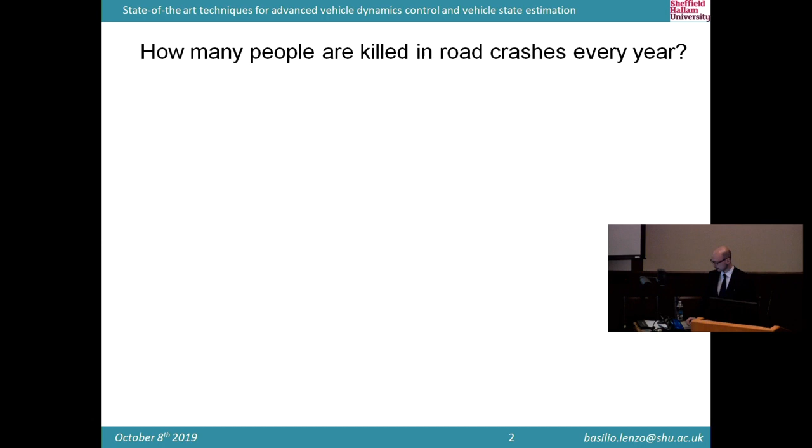Roughly, how many people do you think are killed in road crashes every year? Like, I don't know, 1,000, 10,000 or something. Just give me a figure. 100K. Unfortunately, it's much more than that.

Obviously, we're all aware that there are vehicle active systems such as the ABS or ESC that help us, to some extent. ABS is the anti-lock braking system - it reduces stopping distances and keeps vehicle steerability. ESC, electronic stability control, prevents unintended, potentially dangerous lateral behavior. If you look at figures of estimated lives saved by this kind of system, in particular ESC, you'll find that it saves roughly around 2,000 people per year, which is great. But if you look at the amount of people that unfortunately die every year, that's much more than that.

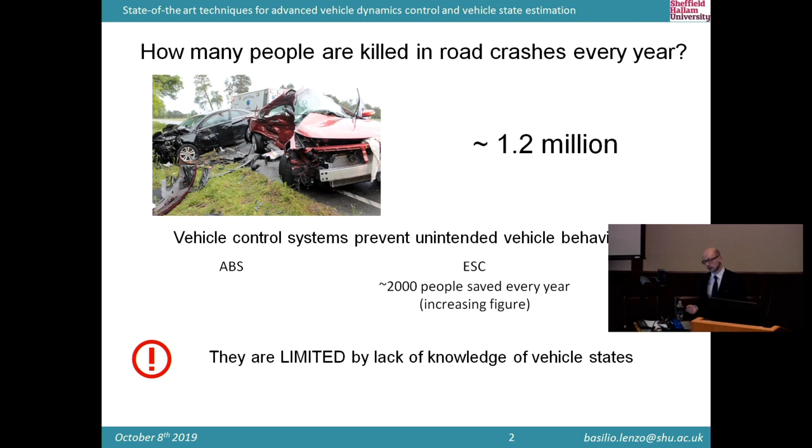So what's the point? These systems, like the ABS, the electronic stability control, they do what they can do based on what they know about the vehicle. With states, we mean key parameters that represent the vehicle motion. An easy one is the vehicle velocity. Some others are less straightforward, but they would tell us a lot. So what's the idea? If we could know more about what's going on with our vehicle, we could do much more than the electronic stability control.

The main idea is - I want to say something about ESC shortly - if you look at how it works, essentially the electronic stability control intervenes, it is triggered when it detects that something is not right. So it corrects a potential dangerous behavior of the vehicle. But when it does so, things are already not good, if you know what I mean. If we could be able to know everything about the vehicle and not just what we are able to know so far, we could actually intervene and anticipate loss of control situations rather than reacting to them.

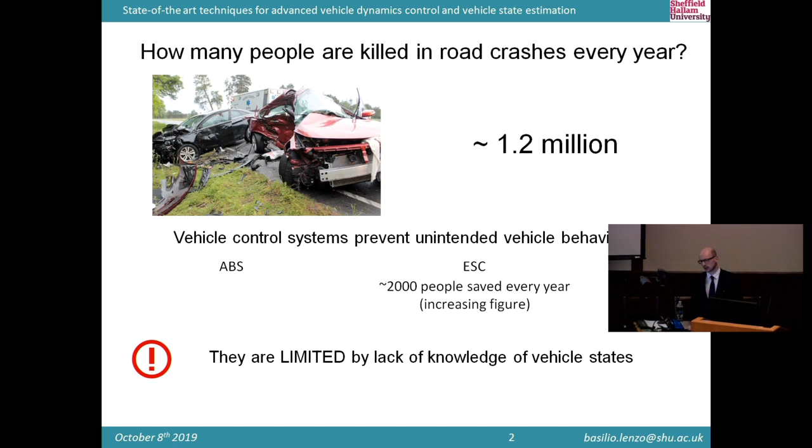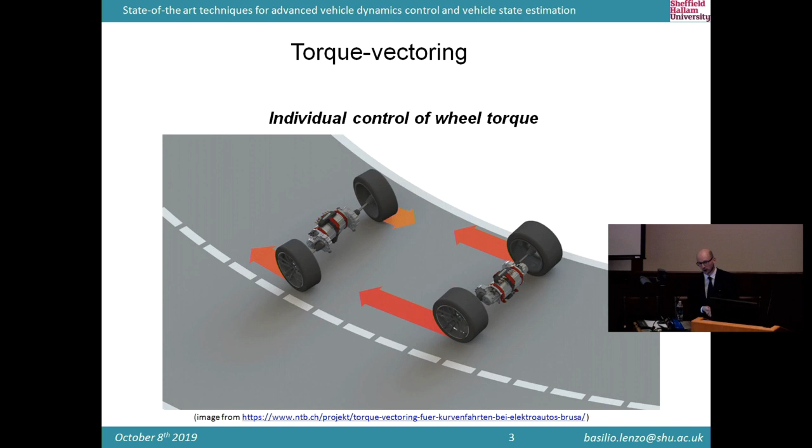And to show you some of the things we can do potentially, I will start talking about vehicle dynamics control. In particular, I'm going to introduce the idea of torque vectoring, which is actually a very simple idea. Literally, what it means is individual control of wheel torque. So, ideally, I could decide what's the amount of torque that I'm sending to each wheel, each corner, right? And to some extent, this is already happening, but there's much more potential there.

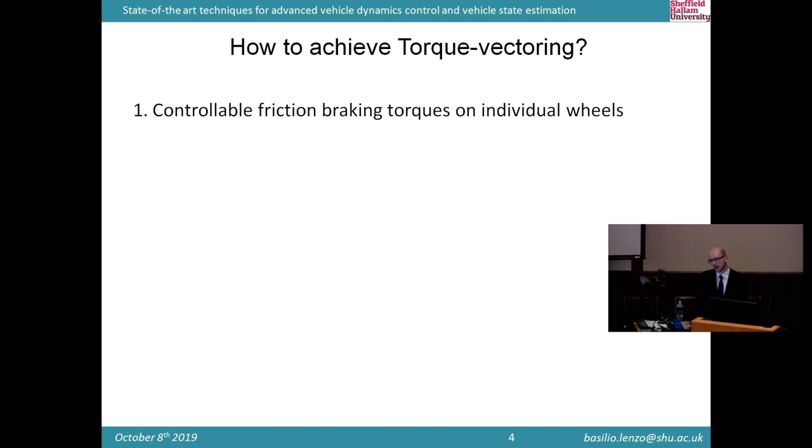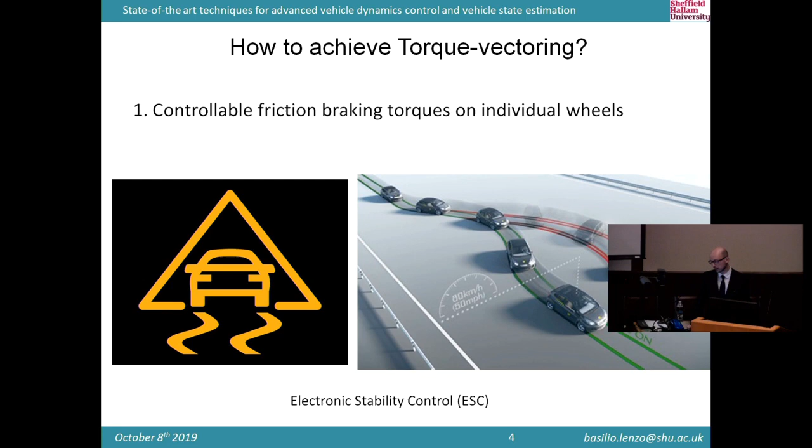Where does that happen? Controllable friction braking torque on individual wheels - that is already happening in your cars now. Well, hopefully it doesn't, but if it does, if it is needed, it's there. And again, that's the electronic stability control, right? So if it detects there's something not right, it will brake a single wheel. Why? To compensate, either excessive understeer or excessive oversteer. And how does it do that?

Well, it compares relevant states of the vehicle. In this case, a simple example could be the yaw rate of the vehicle and the steering wheel input from the driver. If they're too much different, it means something's not right. So in the top example, what we see is that if there's understeer, so the vehicle is going nearly straight, or at least is not cornering as much as the steering wheel angle input would tell us, the ESC says, I'm going to brake a rear inside wheel so that I would produce a compensating yaw moment that would help me correct my course. And vice versa, obviously, in a case of oversteer.

Not sure you're familiar with that, but that takes place whenever needed in your cars already. Obviously, since you are applying a braking force, you're reducing the vehicle velocity. We'll come back to this.

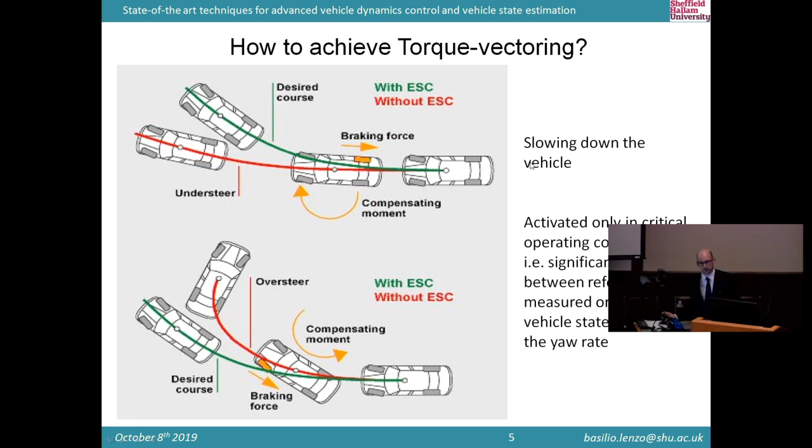Is there another way to achieve torque vectoring to some extent? Yes, a limited slip differential, for example. As long as it's not an open differential, the torques sent to the left and right shafts are different. This is a mechanical system, so there are constraints you got to satisfy, such as more torque going on the slower wheel of the axle.

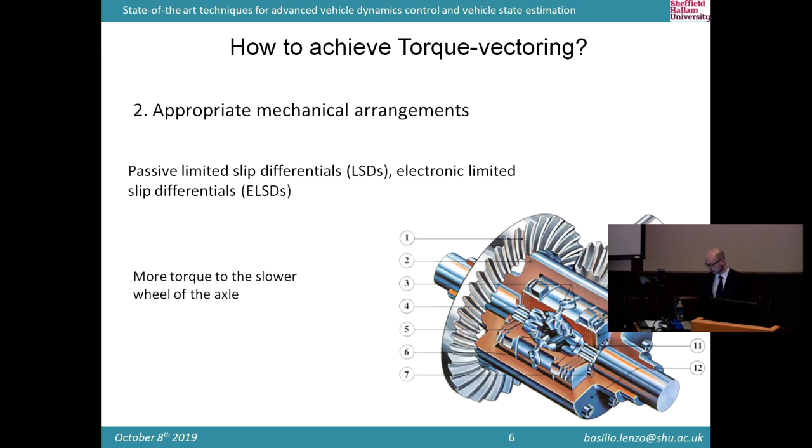Is there another option to achieve torque vectoring? Yes, that's the most recent one: electric vehicles with multiple motors. If I've got, like here, 4 motors, but even just 2 on the same axle, I can do torque vectoring by definition. With 4 motors, I request whatever amount of torque I want at each of them, so I've got the amount of torque I want at each corner of the car. And you see here, there's not really a constraint like in the differential, so I can send more torque on the faster shaft or vice versa, or whatever.

Obviously, it is an over-actuated system. What does that mean? Well, in a standard internal combustion engine car, you push your throttle if you got 1 motor to satisfy your request. But if you got more than 1, you got some freedom, so you can make the most of it. We'll see how.

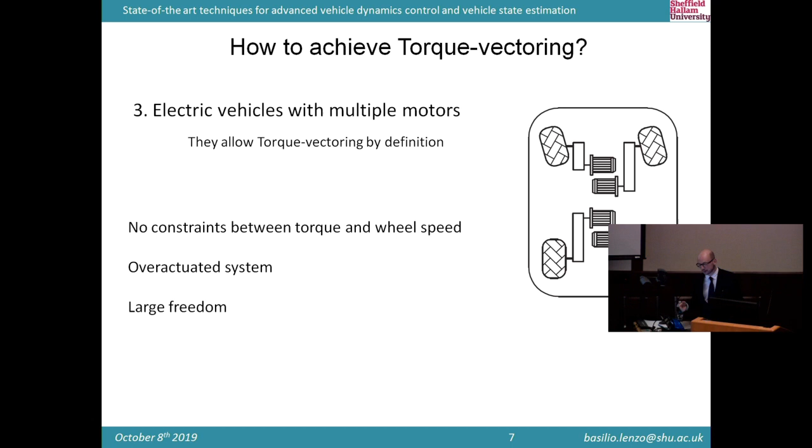In particular, when it comes to electric vehicles with multiple motors, I'd say there are mainly 2 main things you can do with torque vectoring: on one side, focus on energy efficiency, and on the other, changing the vehicle dynamics.

Energy efficiency wise, what's the idea? The idea is pretty simple. I've got to generate a certain traction force or braking force that depends on my pedal position. So the question is, since I've got multiple actuators, where do I send the torque? For example, here you see maybe more at the front than the back, maybe 70-30%. Is that optimal? Or maybe the best is 50-50, or 20-80, or what, in order to maximize the efficiency of the system.

On the other hand, if you request more torque on one side of the car compared to the other, what happens? Well, like here, there's more on the right side than the left side. You generate a yaw moment effect, a yawing effect, called a direct yaw moment, MZ. So what you're able to do is change the response of the car, the dynamic response of the car.

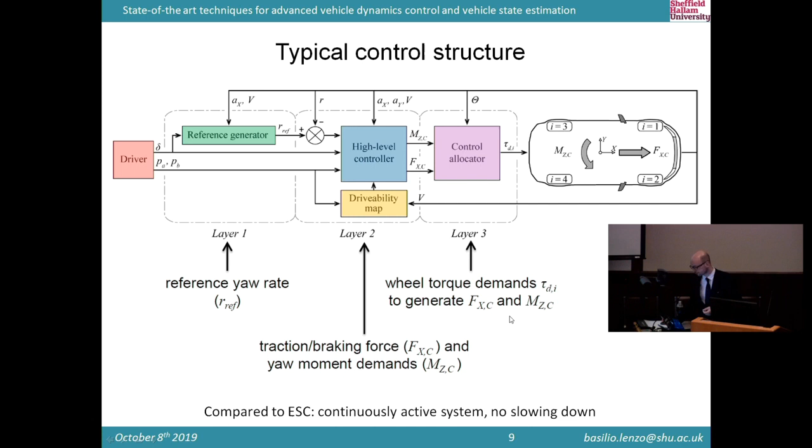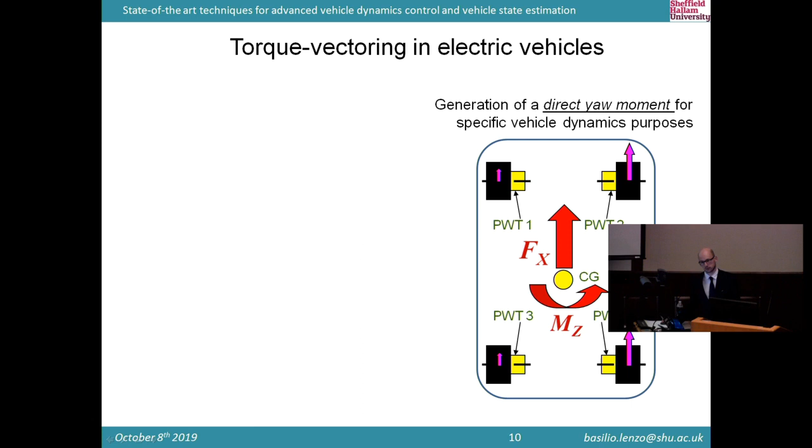So I'm going to focus right now for a while on this aspect. If I ask for more torque on one side of the vehicle compared to the other side, I've got a yaw moment that is generated. And what do I do with that? What can I do with that? Let's have a look at the cornering response of the car, which turns out I can design. But what is it, first of all?

Think about it simply: you are on a circular trajectory, and you stay there all the time, but you accelerate, going from say 20 to 100 kilometers per hour, staying on the same circle. So as you increase your speed, what do you expect to happen to the steering wheel? You stay on the circle but go faster and faster. What happens to the steering wheel? How much more or less, does it stay the same, increase, decrease? What do you think?

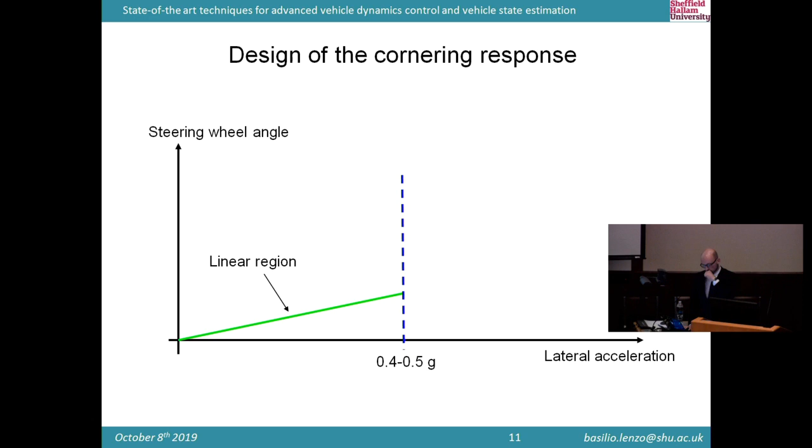Wouldn't that depend on whether you're in an oversteer or understeer kind of situation? It would, yes. And since a standard passenger car is understeering, that would increase, if you think about it. So you would need to increase the steering wheel input as you increase the vehicle velocity. If you plot the steering wheel angle as a function of lateral acceleration, what you get is normally a linear behavior, up to like 0.4 or 0.5 g, g being gravity acceleration. Then at some point it's non-linear, and finally there's an asymptote, and that's it. Then you're drifting.

What can you achieve potentially with torque vectoring? Well, you may decrease this slope, which by the way is related to the concept of understeer you've mentioned. You can increase the linear behavior, and this is an important one: you can also increase the maximum achievable lateral acceleration, essentially because you are moving towards a more neutral vehicle. If the vehicle is closer to being neutral, you're getting closer to making the most of the two axles in terms of force availability. So if you've got more force, second Newton's law, right? F equals ma. If you've got more force, you've got more acceleration.

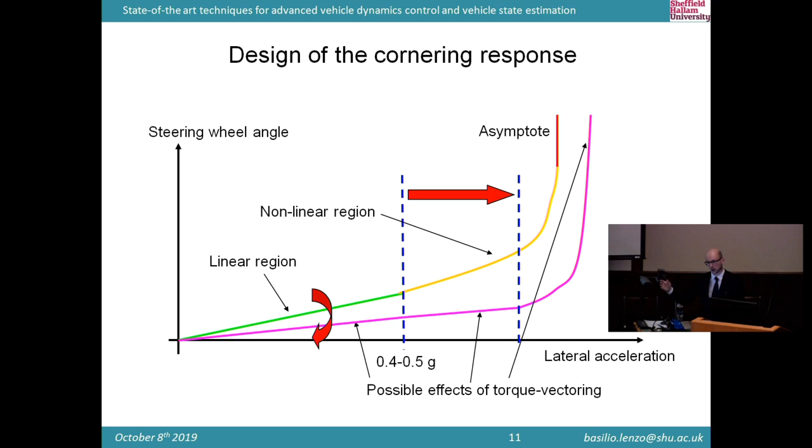Now, I'm not going into the details because we haven't got much time, but the thing is, my baseline vehicle

looks like this, something like this, depending on the longitudinal acceleration. And what I need to do here is design whatever my target is. This isn't a big deal, it's just an analytical formulation of these curves. So whatever you want, you actually need to describe that analytically. Here there's no big deal going on, so it's a line, up to a_y star, which you decide, again, as an engineer, and then it gets exponential.

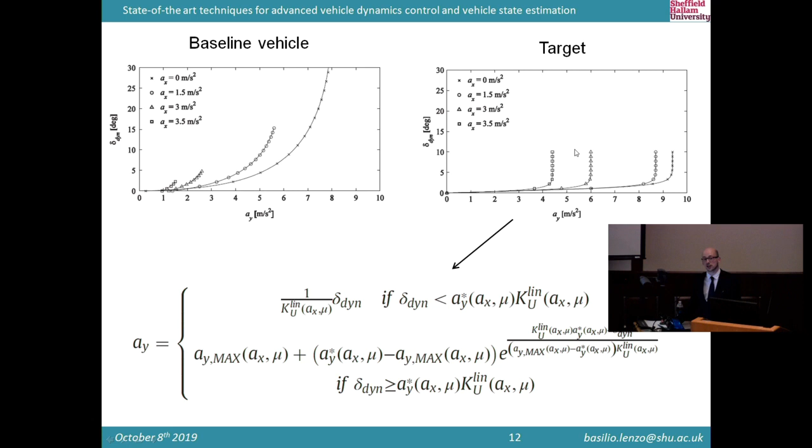But that is an example, I'm not saying you have to do that. I'm saying you can design your vehicle cornering response.

Once you've done that, you get into a procedure that you've got to follow. I'm not going into detail, though I'm happy to discuss it afterward. But the concept is, if you remember the green block we mentioned before, the reference generator in layer 1, that in the end happens to be just a lookup table that, based on the steering wheel angle, vehicle velocity, and longitudinal acceleration, provides you with the reference yaw rate. Here's how to build it. I'm not going through that, but it's essentially very simple.

You use steady state equations for the vehicle equilibrium equation in steady state conditions, you use your defined target cornering response, and then some basic kinematics.

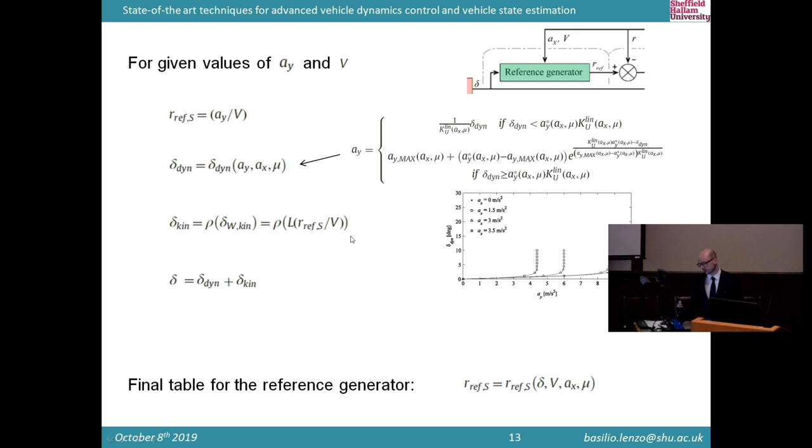In terms of control, like I said, you can use a PID controller and keep it simple. Actually, most of the time it works pretty well. You can have different formulations, like sliding mode control, H infinity, or anything. But in the end, you'll end up with a target yaw moment to follow the target yaw rate. What I'm showing here is some examples.

We've got here the baseline vehicle, which means the vehicle where there is no yaw moment, and what we call a sport vehicle, which is obviously the one we've designed. It's called sport because it is less understeering than the baseline vehicle, or if you want, it's a little bit more oversteering.

Even though the target cornering response is designed in steady state conditions, you do get benefits in transients. We see an example here of the yaw rate resulting from a step steer maneuver.

What is a step steer maneuver? You're going straight, say 100 kilometers per hour, and then all of a sudden you apply a steering input, roughly at 400 degrees per second, so a very quick one, and you keep it, and you see what the car does.

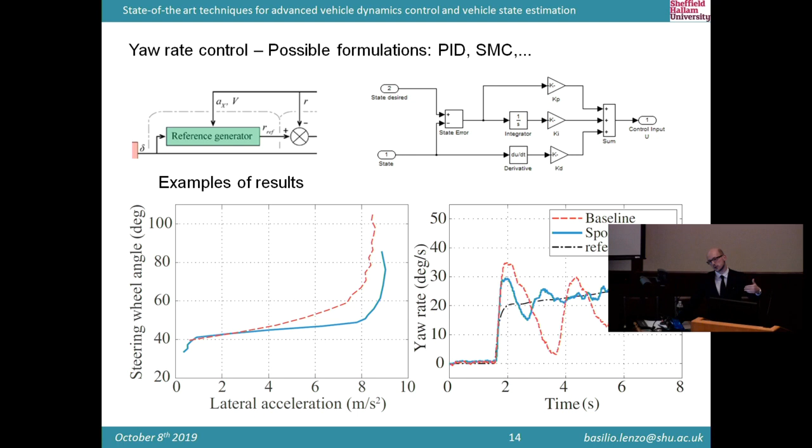If you look at the transient behavior you've got here, what you see is that the controlled vehicle is much better in terms of that transient response. The oscillations of the controlled vehicle are much better, let's say less, than in the case of the baseline, the passive vehicle. So the concept again is, even though the whole thing has been designed in steady state conditions, you do get benefits in transients as well.

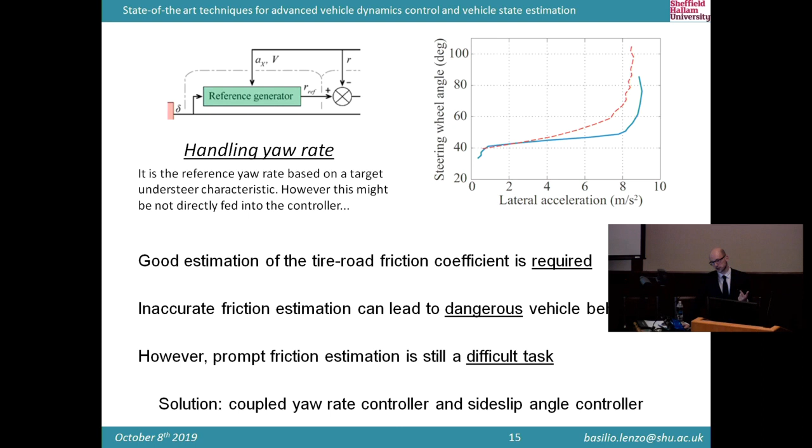And what is it actually? For those of you who do not know, it is simply defined as the angle between the velocity vector of the center of mass of the vehicle and the longitudinal axis of the vehicle. That angle is the sideslip angle, very often indicated with the Greek letter beta.

Obviously, when you're going straight, that's zero. But whenever you're not, it's there. It's really small, normally a few degrees, but it's there, and that's a really important parameter.

So what did we do? Like I said, sideslip angle is normally pretty small, and it gets big when things get critical, such as if you're about to spin, for example, or lose the vehicle. This parameter will get significantly bigger than a couple of degrees.

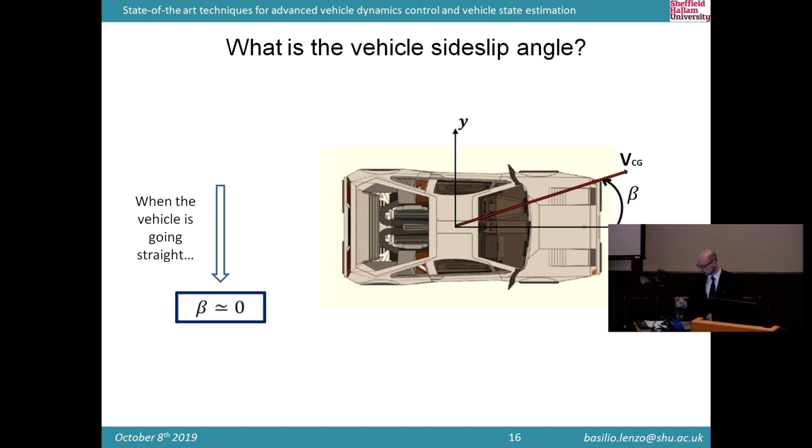So the idea was, let's introduce this parameter in our controller. What we see here is exactly the same concept as before in terms of layout and framework, but there's an extra block here, which is simply a correction block of the yaw rate. Before I said just reference yaw rate, then I called that handling yaw rate, because the actual reference is not going to be just that, but there's a correction block in between.

What does this block do? It looks at the sideslip angle. If the sideslip angle is small, no issues, so it's not doing anything - this F will be 0 if the sideslip angle is less than an activation threshold. If F is 0, my reference yaw rate equals the handling yaw rate. But if the sideslip angle is within an activation or upper threshold, or even beyond, then F is no longer 0, so it does make a difference - it corrects the reference yaw rate, decreasing it based on the sideslip angle.

We call that a single input, single output formulation, because differently from other controllers, it gets a single input and a single output instead of multiple outputs in terms of yaw moment. In the literature, there's a yaw moment contribution that looks at the yaw rate error, and a yaw moment contribution that looks at the sideslip angle error. But these two effects are, let's say, one against each other, so it's not easy to control them. So what we do here is correct the reference yaw rate based on the sideslip angle, so we have a single input, the error, and a single output, just the yaw moment.

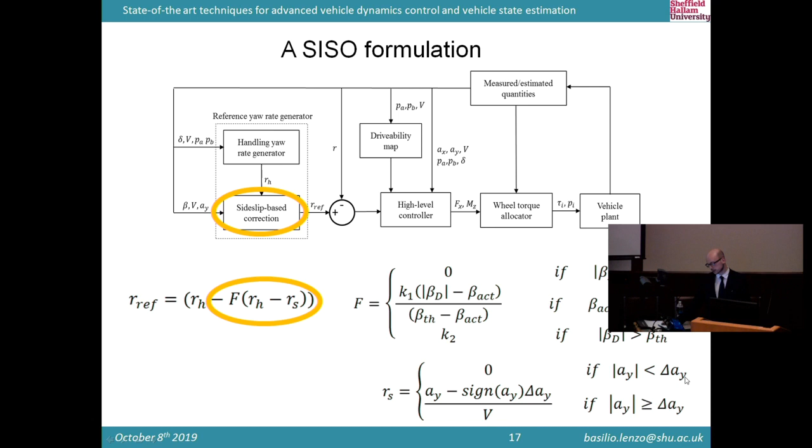RS here is what we call a stability yaw rate, and essentially it is a measure of what is actually achievable by the vehicle in terms of yaw rate. It depends on the actual acceleration and the actual velocity of the vehicle, plus some tuning parameters.

Another point I'll quickly go through is where should we measure the sideslip angle, or what point should we use as a reference for it? Normally you would look at the center of mass, like I said before - we call it BCG, center of gravity. But assuming, as is often done, that the vehicle is a rigid body, you can potentially look at the sideslip angle anywhere else. In particular, we found that if you look at the sideslip angle at the rear axle, things work better.

Long story short, the reason is simply that there is no kinematic contribution, unless the vehicle has rear steering capability, if you look at the sideslip angle at the rear axle. A simple example is a parking maneuver - you're going really slow, so there's not much force there, the slip angle is small, but the steering angle is big. So if you looked at the sideslip angle elsewhere, that would be big, but just because the steering angle is big. It's a kinematic, intrinsic thing - a geometrical effect. You can't really correct it because it's there. What you need to correct is the dynamic contribution.

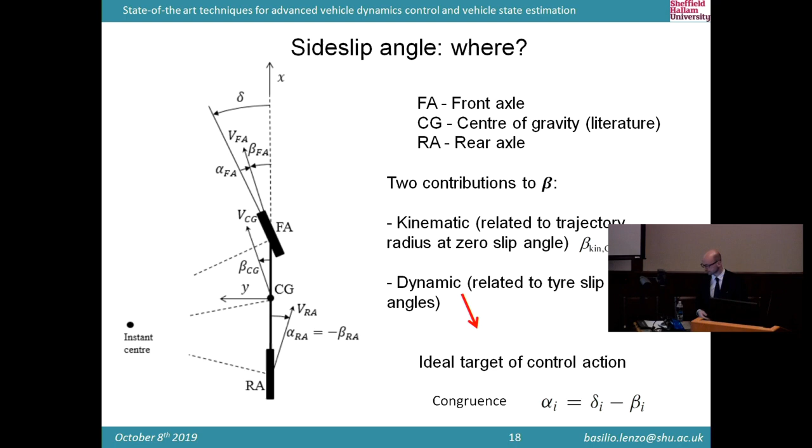I thought it was worth quickly mentioning this tool, which you might be familiar with or not, whenever you deal with a dynamic system really - that's why I put it here, not just for vehicle dynamics. It's phase plane analysis, where you put two relevant quantities, in this case the sideslip angle and its derivative. Blue points are a set of initial conditions - we've run quite a lot of simulations here. And then the red lines describe the evolution of the system.

What we wanted to show here is that without this correction based on the sideslip angle, there are initial conditions - quite critical ones anyway - for which the system essentially is unstable. So what it means is, in our case, you lose control of the vehicle, right?

What we show here is that with the contribution we mentioned earlier, the points that were stable are still stable, obviously, and the points that were not stable do become stable, and they got around this point here, which is tunable by the engineer.

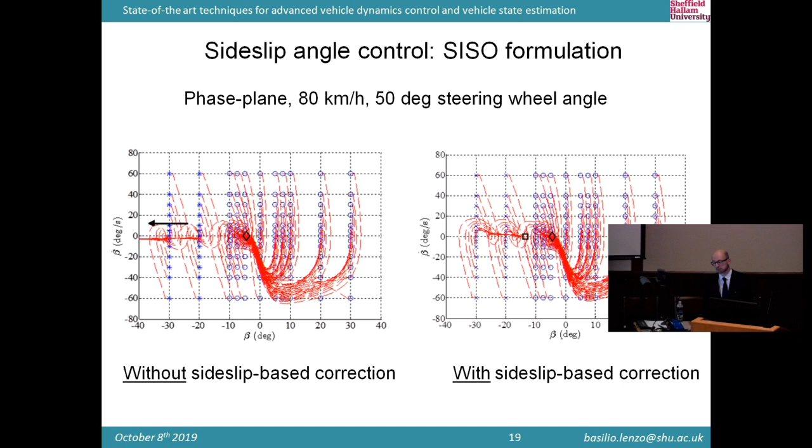This is what I call the upper threshold of the side-slip angle. So why did we do this? Just to see that, at least in simulations, things were working, because later on we tried it on the actual car. And what's the car?

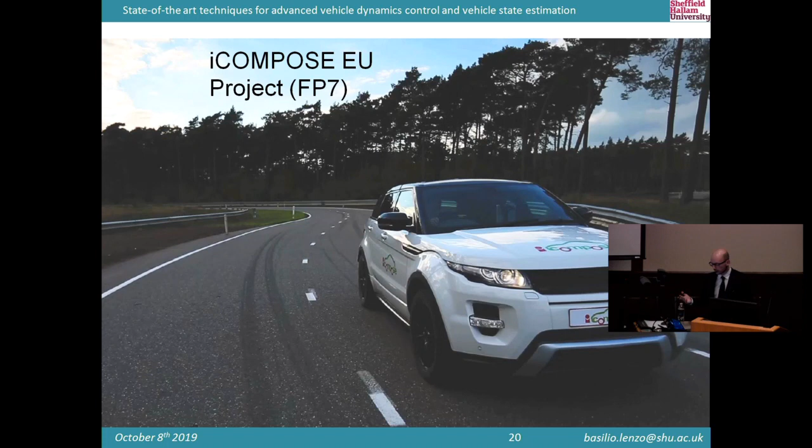I would focus on the torque, which is quite big. We had 80 Newton meters nominal, but with a gear ratio of around 10, that means we got 800 Newton meters per wheel, which is quite a lot, and overall 3,200 Newton meters for the whole vehicle nominal. We had a vehicle control unit based on dSPACE, so we could deploy our control techniques developed in MATLAB Simulink via dSPACE and the dSPACE autobox.

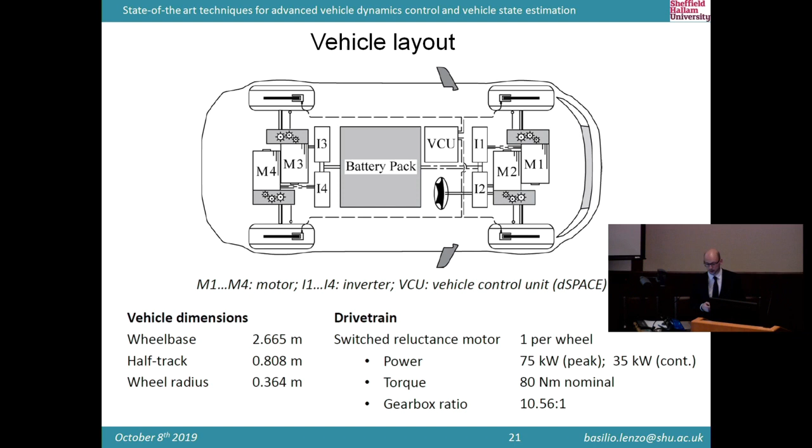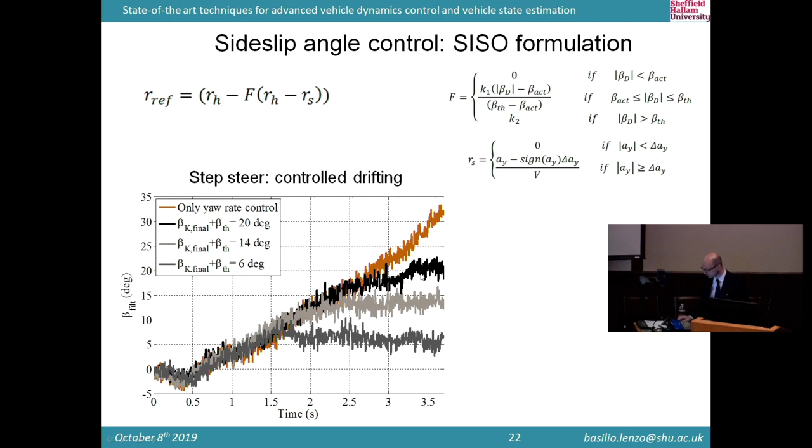Another test we carried out is slalom on a low friction area. A couple of tests: one on line 1, so high friction and low friction, then high friction again; one on line 2, so it's a continuous mu-split condition.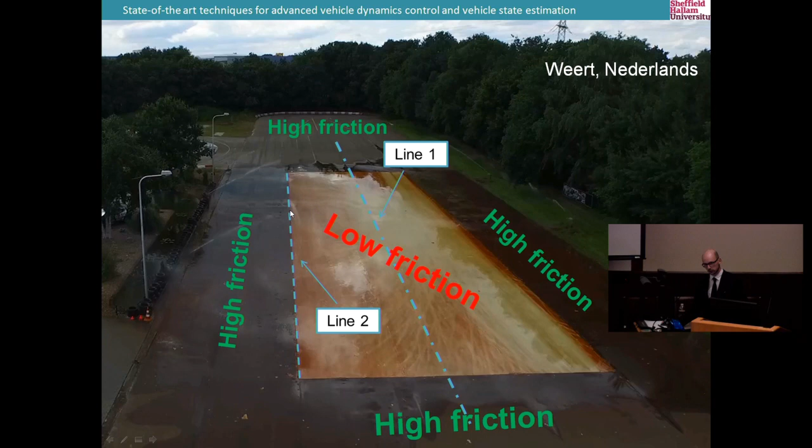Just curious, do you want to try turning that mic off? Yeah, maybe just use it. I don't know if that's — I think it was because I was doing this. Might be okay, but let me switch this off. Just see that one. Can you hear me?

What we essentially see here is that in terms of side-slip angle, the active vehicle without correction is worse than the passive vehicle with no yaw moment at all. The reason is that the torque vectoring control is following a reference yaw rate that depends on the friction coefficient, but the friction coefficient used is not the actual one you get when driving, and we'll see that later as well.

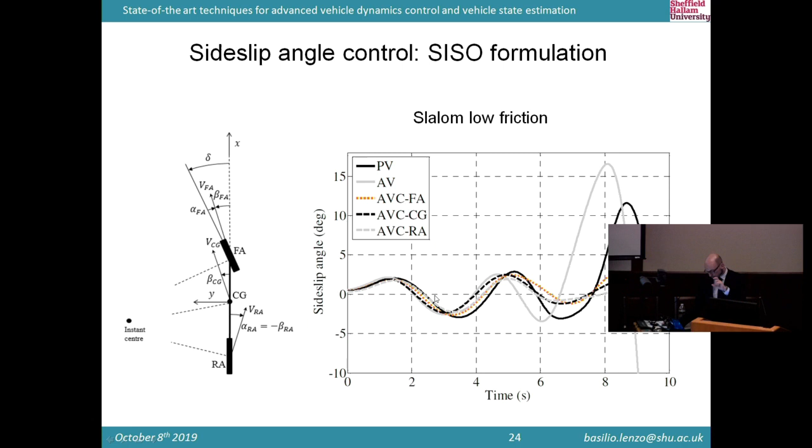In terms of front axle, center of gravity, and rear axle — back to what I said earlier — if you take the side-slip angle at the front axle, at the center of gravity, or at the rear axle, essentially you see that the rear axle is better, bounded in a smaller range.

Here we can see what happens in terms of yaw rate, for three tests: baseline passive vehicle, yaw rate only, and yaw rate plus side-slip angle correction. You might see that 60 degrees per second is a lot, and actually we lost the vehicle there. So we lost it with the controller and no correction, but we didn't lose the vehicle with the baseline configuration.

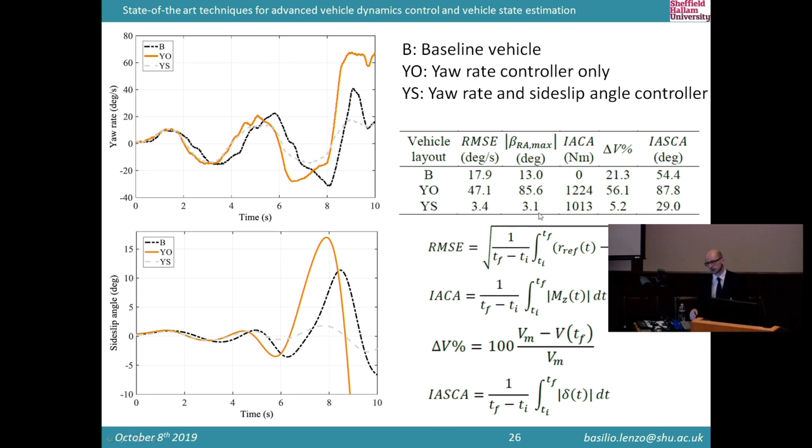Side-slip angle wise, again here it goes much negative, so definitely a big value. The low friction area was between 4 and 9 seconds. This is the first test, so high friction, then low friction, then high friction again. There's not really much time to talk about these performance indicators, but it might be worth looking into that — most of them are quite standard, like the root mean square error. Essentially we had to quantitatively assess what was going on there.

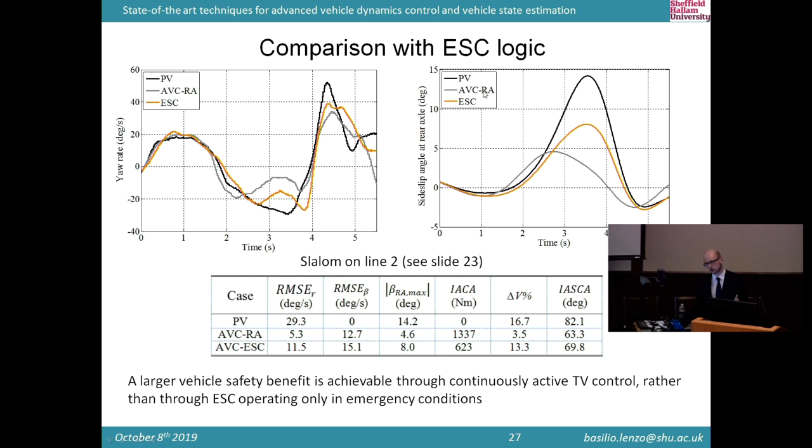There's not much time for me now to go through them. ESC logic: the electronic stability control intervenes only when it detects that something is not right, so we implemented a basic electronic stability control logic and compared it with our controller. What we found essentially is that since our controller is active all the time, it happens to be better than the electronic stability control, which obviously is better than the passive vehicle. So the electronic stability control is better than the passive vehicle, but the continuously active controller is even better.

You had no sensor on the trailer, just the back end of the vehicle? So we had an accelerometer on the trailer, but we didn't really use that for the control. The only thing we measured was the hitch angle, the misalignment, and we did that by...

What did you measure? The hitch angle, so the misalignment between the car and the trailer. So if they're like, this angle here, like 90 degrees say, or 0. That's the only thing we measured.

So you weren't doing any braking on the trailer? No, we just attached the trailer. We were not controlling that at all. Just controlling the 4 motors of the Range Rover Evoque.

Right. So this is what we've seen so far, the first part. Like I said, direct yaw moment control can do lots of nice things, as we've seen. The other aspect I'll quickly go through is energy efficiency.

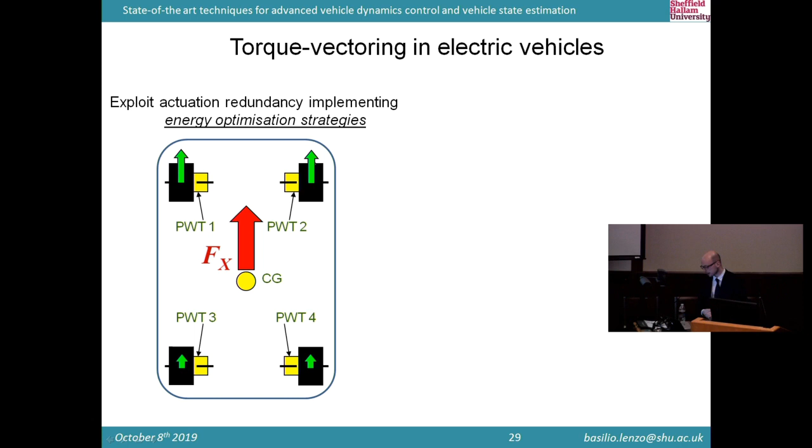It boils down essentially to this layer here, layer 3. Once I know what is the force at the moment and what is the moment that I want, the thing is, how do I distribute the torque between the 4 motors? There's no time to talk about it fully, but actually it's not completely true in the sense that you could work on this one as well.

If you disregard purely vehicle dynamics criteria, and ask yourself, can I find the optimal yaw moment in terms of energy efficiency? Well, you can. There's a paper on that, but I can't go through it right now. Anyway, here we assume that the force is given, the moment is given, so we are just here.

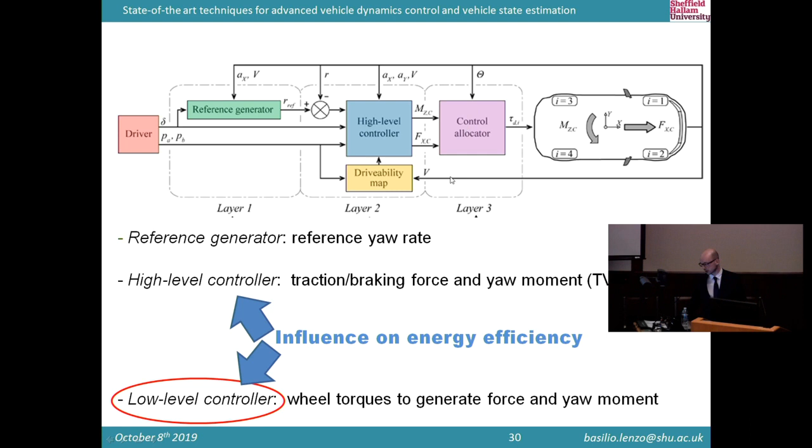It is very easy to show that if the steering angle at the wheel is small, which is quite a reasonable assumption, and the vehicle tracks are the same, which is also a fair assumption, then you can separate the torque demands per side: this is the left side torque demand, this is the right side torque demand. If you look at this formula, it's easy to see that if there's no yaw moment, you just get half of the force on either side, and R is just the average wheel radius.

So this is in terms of torque, force times radius. M_Z is yaw moment based on the conventions we used. This plus here is more on this side than on the other side, and D comes from geometry and the definition of moment. So the problem reduces to: I've got this much torque I want on this side of the vehicle, how do I split that between my front and rear wheel? We call that the control allocation, CA, problem.

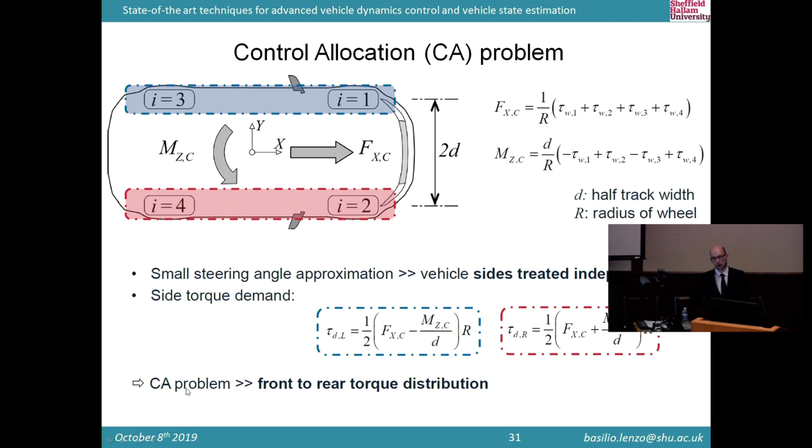To understand what was the best thing to do, we carried out a large campaign of experimental tests on a bench called a rolling road. Essentially, the vehicle is there, but there are two rollers, one for the rear axle, one for the front axle. So the vehicle is there, but everything is moving, so you can ask for whatever amount of torque, set torque and speed, and see what happens.

In particular, what we measured there was the drivetrain power loss. How did we measure that? Well, we had the voltage and current going through the battery, so voltage times current is power. And at the rollers, we had information on force and velocity, so force times velocity is power. So we had power input and power output, and the difference is what you lose in between. That's what we plot here: the power loss as a function of the torque demand and of the vehicle velocity.

It's rather obvious, or let's say we expected this to increase with the torque demand, to increase with the vehicle speed. What is less obvious is what's going on here.

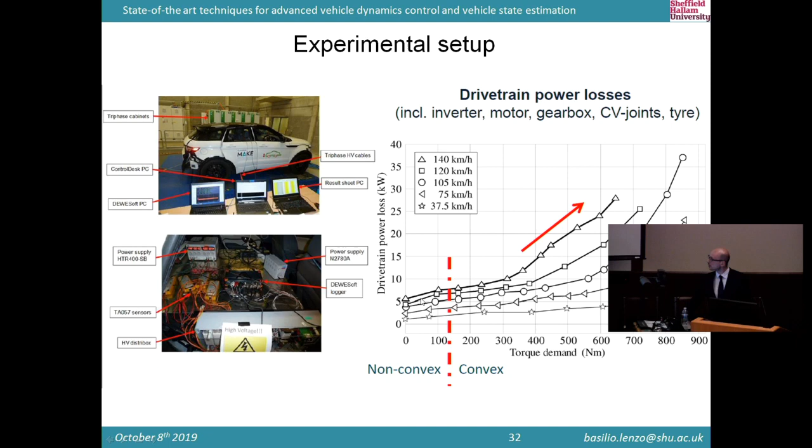I'm going to show you this one to make it simpler to understand. Suppose we've got a behavior that looks like that, so the power loss is just concave, just like that. I've got two motors, right? So let's say on the left side, 100 Newton meters. How do I split them? But if the power loss curve looks like that, there's no reason to use two motors.

I just use one. Suppose, let's say, I'm at 100. So suppose I'm here on 100 and I get this power loss. Why would I use, for example, two motors, 50 Newton meters each? Because I would lose, instead of this, I would lose twice this. So definitely not the right thing to do, right?

On the other hand, the other way around, right here, if the behavior is convex, things will swap, right? So why would I waste this much power when I can lose, why this much, when I can lose twice this? Twice this is less than that, right?

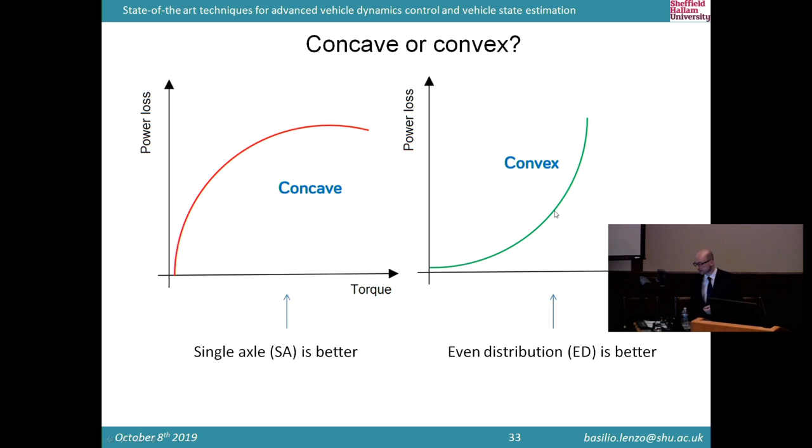Thing is, what have we got here? Actually, both of them. So what does that mean? If you think about it intuitively, there will be a range of torque demands for which it's better to use a single motor, and after some sort of switch in torque, it is going to be better to use a sort of 50-50 allocation.

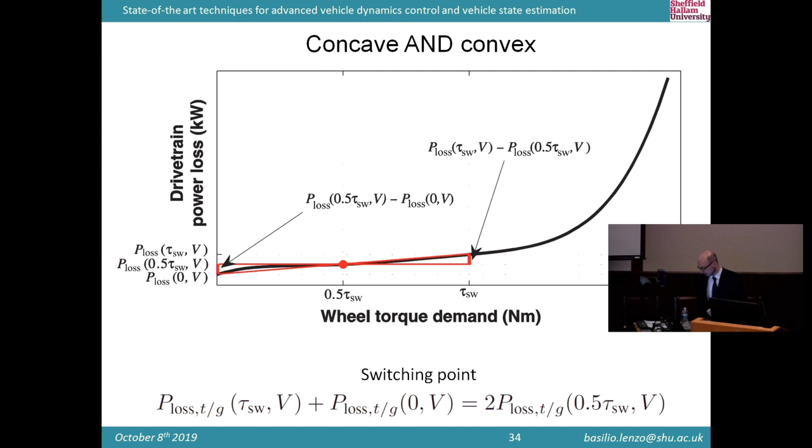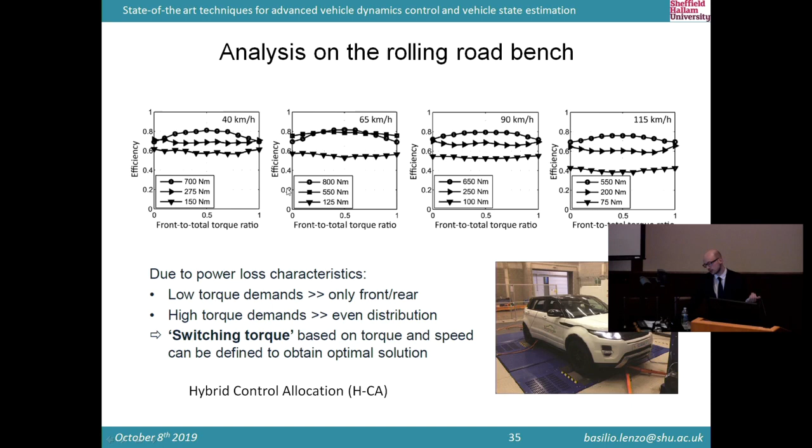So you switch from, it's best to have a single axle, or actually it's better to have a 50-50, even distribution. We worked out the values of the switching torques as a function of the vehicle speed, and we ran a series of driving cycles. I guess you're familiar with what a driving cycle is, but essentially it's a speed profile, right?

Going straight, you gotta follow a speed profile. Some pretty well known, I think, are the NEDC, like New European Driving Cycle, the EUDC, there's plenty of them out there. This is one we came up with, the Surrey Designed Driving Cycle, and the reason was...

Maybe I've got some time. The reason was this: if you look at the NEDC, you know that this cycle is quite a mild cycle, it's not really demanding. What does that mean? You're nearly all the time below this curve, because again, torque demands are not huge. So if you are always, or nearly always, below this curve, it means that the best thing to do is nearly always use a single motor. So the advantage of using a control allocation with respect to the single axle distribution, yes, it's positive, but it's not that much.

On the other hand, what we did then is simulate a cycle but with an 8% slope. What's the reason? This time we get generally high torque demands, so we generally end up here, in this area. But if that happens, then it means that the best thing to do is nearly all the time the 50-50, the even distribution. And indeed, if you look at the benefit of our control allocation compared to that, again, it's there, but it's not that much.

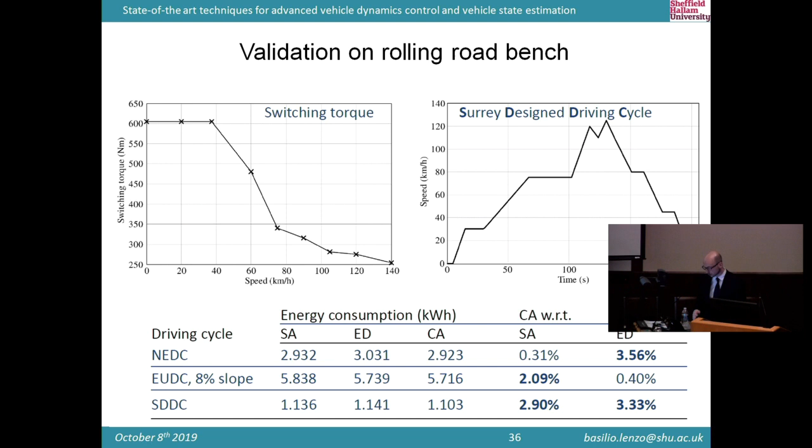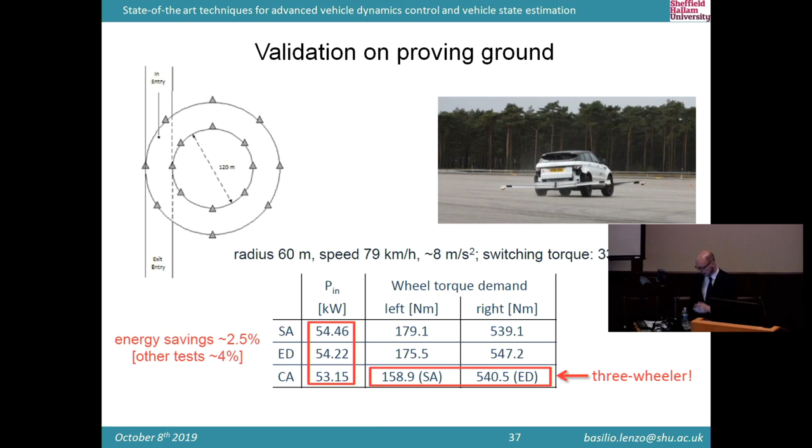You might have noticed that earlier on I've been using the sideslip angle value. Remember, that was this angle here, between the overall vehicle velocity and the longitudinal axis of the vehicle. But how did I get that?

In our case, we had a prototype and we actually measured that angle using a sensor called a Datron, Correvit Datron. There's a couple of sensors, 2-3 types, but essentially they all do the same thing - they measure it. The downside is this sensor costs more or less 15,000 to 20,000 euros or pounds. That's obviously a lot, and you cannot put that into a standard passenger car.

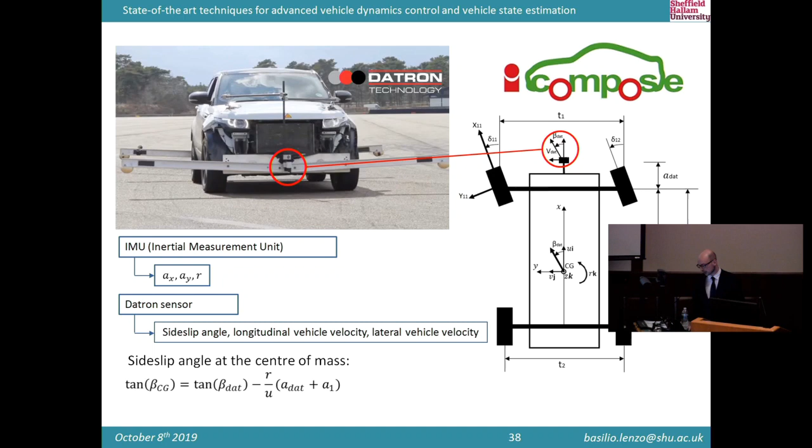Yet you've seen just one example of how powerful the knowledge of that parameter would be. I remember the opening slides - if we know more about vehicle states, we can do much better. So the final few minutes will be on state estimation. In particular, I'm going to focus quickly on the sideslip angle, just because we talked about that, but there's many other states that are relevant, and their knowledge would allow us to dramatically improve vehicle safety.

And by the way, I'm sure you've heard of autonomous vehicles. Sooner or later they'll be mainstream, who knows when, but they need to know very well what's going on around them - they need a very precise understanding of the environment around them. But you also need to know what's going on with yourself, with the single vehicle. And so right now, we don't know much.

When it comes to the sideslip angle, we can either measure that, like I said, but it's so expensive. So this is the motivation for estimation techniques - ways to work out what we need, sideslip angle or other relevant vehicle states, without a sensor. Sometimes you can measure them, but maybe it's too expensive. Sometimes you can't even measure some states. What's the issue there? What's the challenge? Well, it's not straightforward. It is difficult. There's plenty of research on that, but nobody's found the ultimate solution, if you know what I mean.

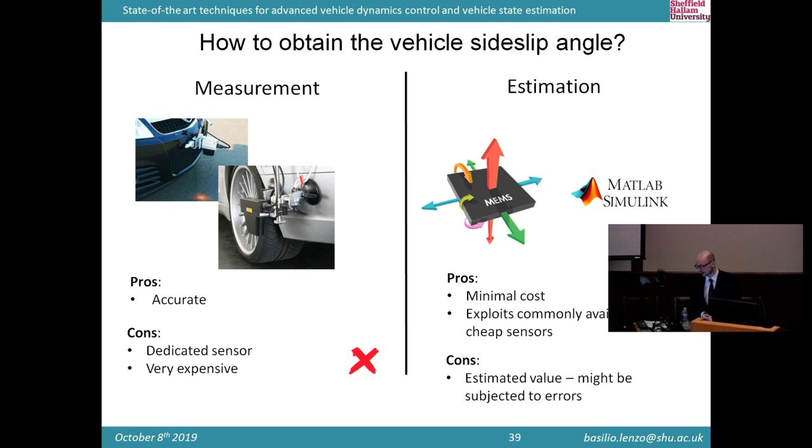My group is one of the groups trying to do that. You might have heard of observers. You might have heard of the Kalman filter, perhaps - some yes down there, so that's good. So how does a Kalman filter work? Because in the end, that's the same thing I'm going to talk about right now.

You have a model of your system, whatever it is - in our case it's a vehicle, but it can be anything. And you've got some measurements available. So what you do is, based on your model, which can be really accurate or maybe not too much, so there's some uncertainty there, you work out what your states might be. But based on the measurements, you're able to correct your predicted states. And by properly weighting between what comes out of the model and what comes using the measurements, you work out your actual estimate.

And what I'm going to talk about here quickly is a technique which is not a Kalman filter - it's a particle filter. You might have heard of that, but I'm going to quickly tell you what it is.

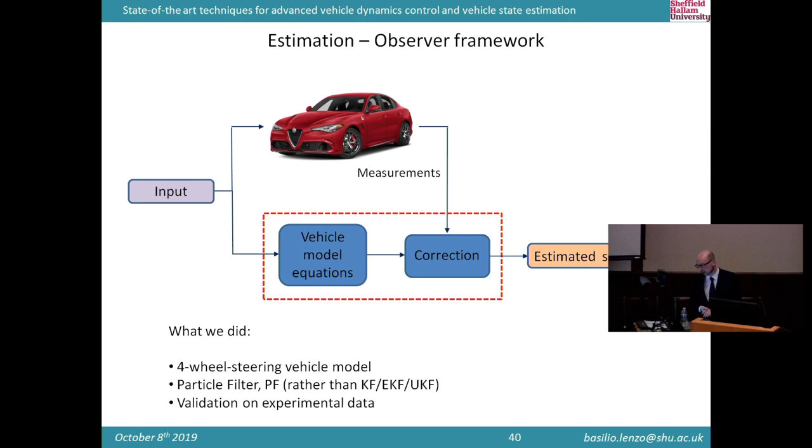This is the vehicle we've used, because we got a collaboration with the DLR - you might know that as the German Aerospace Center. They've got this vehicle platform, which is a by-wire electric vehicle. There's one motor per wheel and also one steering actuator per wheel. So it's quite an interesting platform.

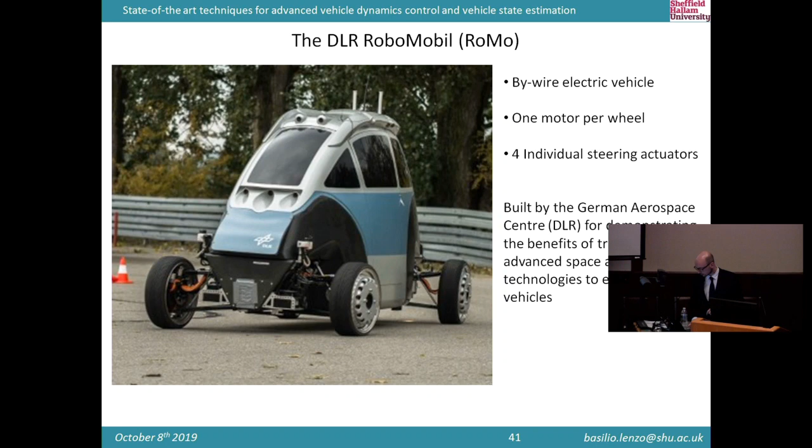Essentially, like I said, we need a model of our system - that's the model of the vehicle, actually quite a simple one. So let's get the concept there. We model it in this case, to keep it very simple, as a bicycle. That's quite common in vehicle dynamics, even if very often not appropriate. Anyway, you model the vehicle as a bicycle, so you collapse two wheels on a single axle into one.

What's in here? Essentially, F equals ma, simple as that. V and R are the lateral velocity and the yaw rate. Here, the derivatives are V dot, R dot - so there's the dynamics of our vehicle. Equilibrium, you need congruence equation and constitutive equation, which I'm not going to talk about right now because there's no time, unfortunately. But what you do normally is you convert those equations into discrete time equations, where x, again, is your state vector, so what you'd like to work out of this.

And this is the measurement vector that contains your measurements.

A couple of words about the particle filter. It is an estimator based on Monte Carlo simulations, so you need a good number of particles, not just 2 or 3. It's much better for some reason compared to the Kalman filter, since several assumptions you have to make with a Kalman filter aren't needed here. So it's a broader, more general framework.

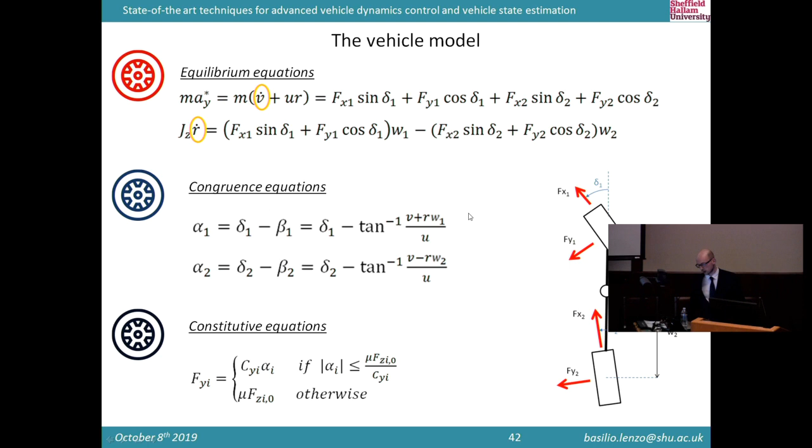It's still linear, isn't it? What's the difference? No. Even the Kalman filter, if you use the extended or unscented Kalman filter, you don't need a linear representation of your system. But your differential equations were linear on the previous slide? No, not really, because one of the states is the lateral velocity, and it appears nonlinearly. So no, it's not linear. That's a good point, because if this were linear, we'd just use a Kalman filter. And actually, the particle filter often turns out to be better than extended or unscented Kalman filters.

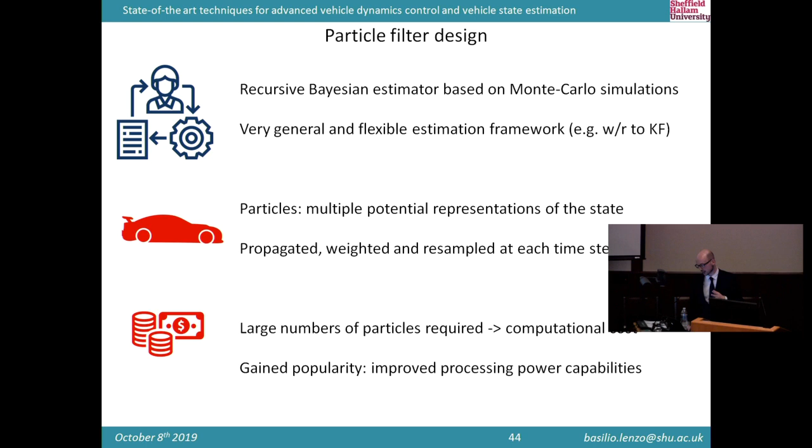Quickly, what you do is you start with a set of particles. What are particles? Potential states. Maybe the lateral velocity is this much, your yaw rate is this much, that's a state. Maybe it can be this much and this much, that's another particle. They're all particles. You've got, say, 1,000 particles, so 1,000 potential vehicles that evolve according to your model.

All of them evolve, so for all of them you can predict what the measurements would be, and then you compare those measurements with the actual measurements. So for all 1,000 ideal vehicles, you work out the difference between the actual measurements from your vehicle and the measurements from those ideal vehicles. Then you need a likelihood function that tells you how likely it is that that particle is actually the one, or maybe that one. Then you weight all the particles according to this likelihood function to work out your actual estimate.

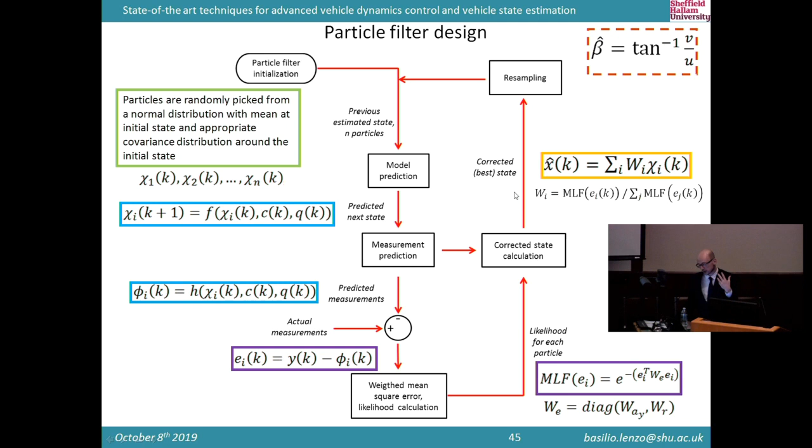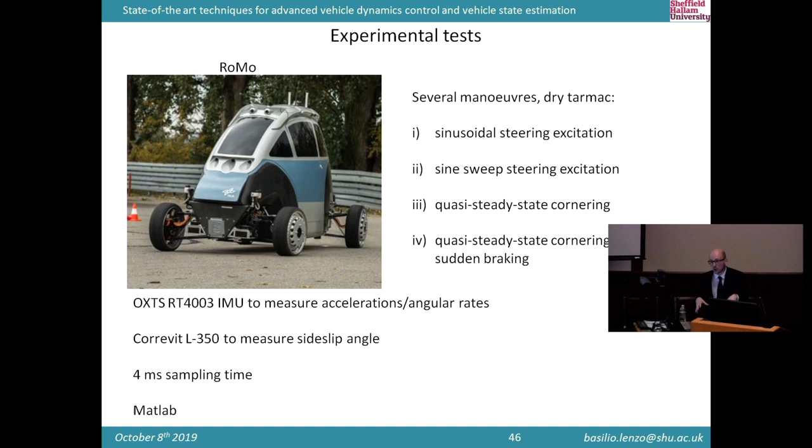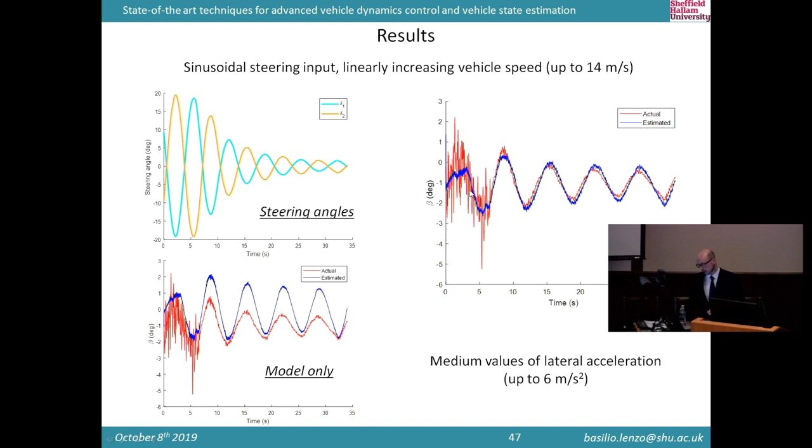Long story short, it worked, on several maneuvers, sinusoidal excitation, and so forth. We had an IMU and a Datron Correvit sensor to measure the sideslip angle, so we could compare our estimate with the actual measured sideslip angle. Remember, all wheels could steer, so in this case the sinusoidal steering input was for the front and rear wheels. You see the plot here, what comes out only from the model, and what comes out from the particle filter. Things worked quite well for all the maneuvers.

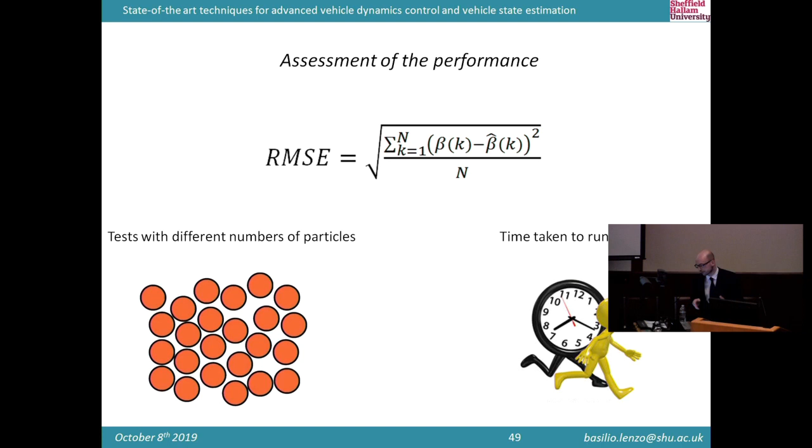We ran an assessment of performance, but the concept is, like I said, we need 1,000 particles, or maybe 10,000, or maybe we can do with 100, because the computational time can be an issue, especially for a real-time application running on a vehicle. So we worked out an analysis and found that, in our case at least, 100 particles gave quite good results.

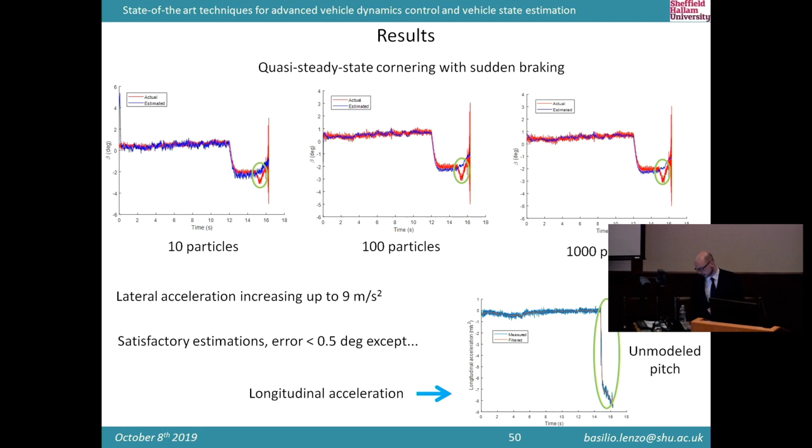So these are the maneuvers, and this is the root mean square error on the sideslip angle. We see that between 1,000 and 100 particles, accuracy didn't change much, but time-wise there was a big difference, so better 100 than 1,000 in the end. Moving from 100 to 10, performance gets a little worse, that's inevitable, but running time becomes comparable to or less than the duration of the maneuver. That opens up potential for real-time implementation, because the error was always within half a degree, which is reasonable.